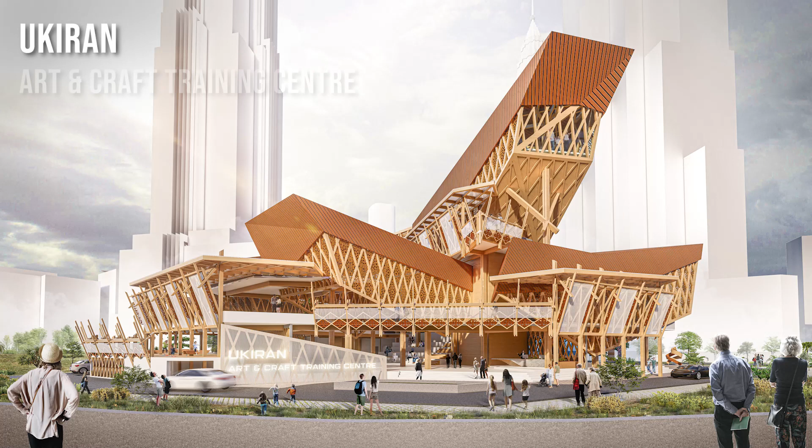Now I will be presenting my final year project, Ukiran Art and Craft Training Center, a wood carving inspired institution. The site is located between the Kuala Lumpur city area and Kampung Baru, separated by the Klang River.

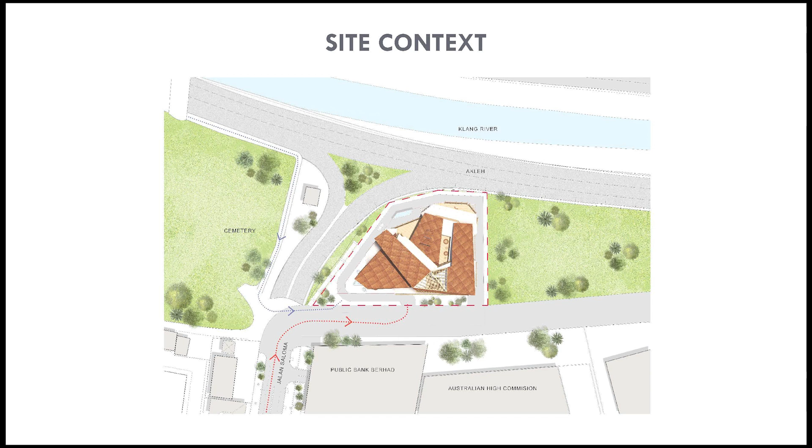I believe it has the potential to become a focal point that brings together people on both sides of the river. The art and craft industry in Kampung Baru has demonstrated positive development; however, it is only popular among locals and still not well known by outsiders due to lack of public exposure. Art and craft of Kampung Baru is an asset of the old generation, and it's important to preserve this unique asset, especially in an urban context of concrete jungle.

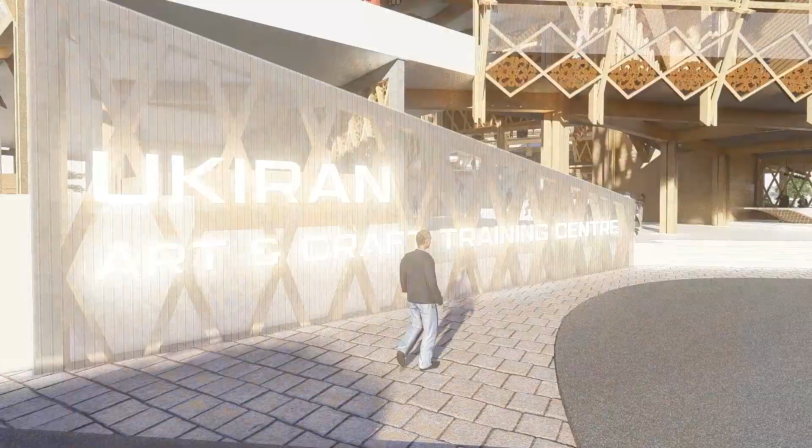The idea is to create an institution that harnesses the memory and history of Kampung Baru, allowing the future generation to recognize and appreciate the glory of art and craft in Kampung Baru. I intend to build an art and craft training center to recognize the potential of the art and craft industry in Kampung Baru and promote it to a larger context, while creating mutual understanding and connection between the people of Kampung Baru and Kuala Lumpur city area.

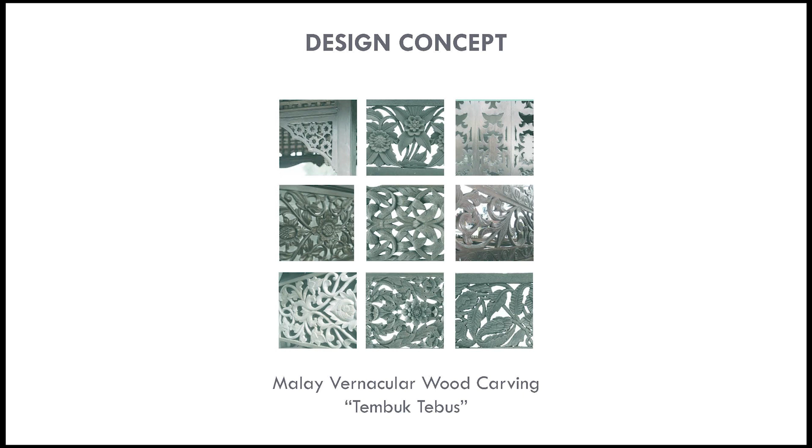The design is inspired by the unique Malay vernacular wood carving technique, reinterpreting the analogy of Tembuk Tebus carving. The four spirits of the wood carving technique—permeability, connectivity, aesthetic, and identity—are incorporated into the facade, structural, and spatial design.

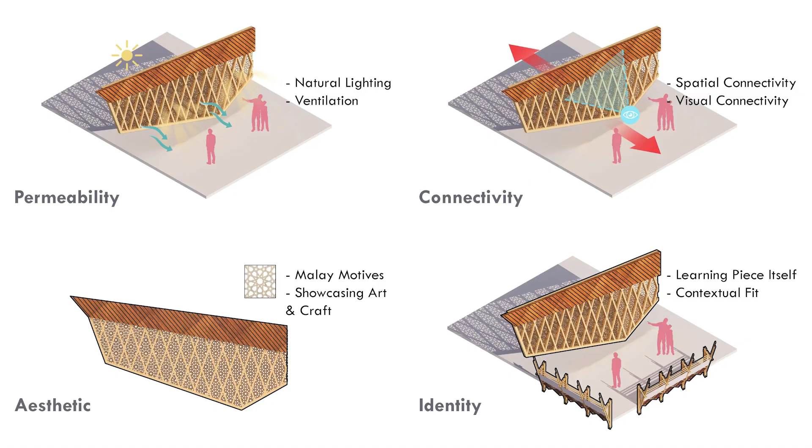Inspired by the Tembuk Tebus, the facade creates a series of frames and geometrical patterns, allowing for daylight and ventilation while also enabling visual and spatial connectivity. The facade also contains rattan weaving that demonstrates Malay motifs, which hold a strong identity in the context and is very appropriate to incorporate into the art and craft training center.

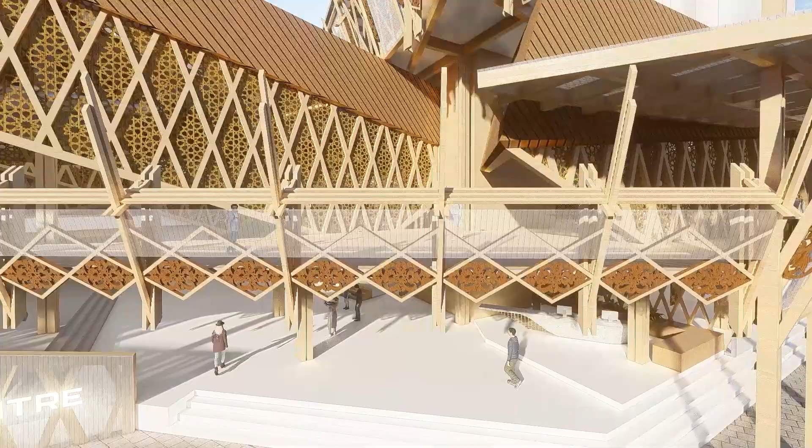Just like the wood carving, a series of porous and flexible spaces are created to facilitate communication and progressive learning in the center. The interplay of solid and void allows people in different spaces to overlap, promoting interaction and communication, and importantly allowing visual communication for them to see and learn from each other, which is appropriate for a training institution.

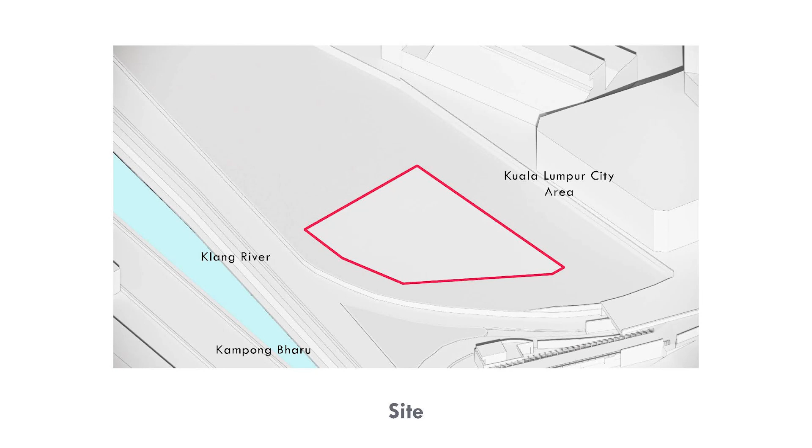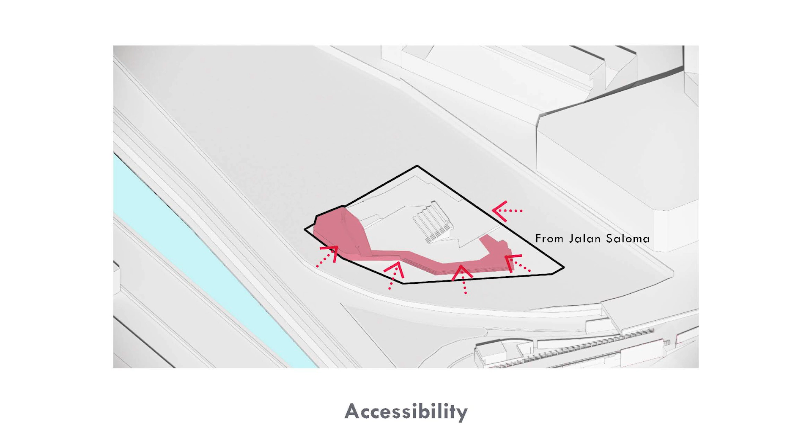In responding to the site context—the Klang River, Kampung Baru, and Kuala Lumpur city area—the ground floor is designed to open up towards the surroundings, allowing access to the building. The building massing has different responses to the site, for example, a visual response towards Saloma Bridge and Kampung Baru, and a hierarchical response towards the Kuala Lumpur city area.

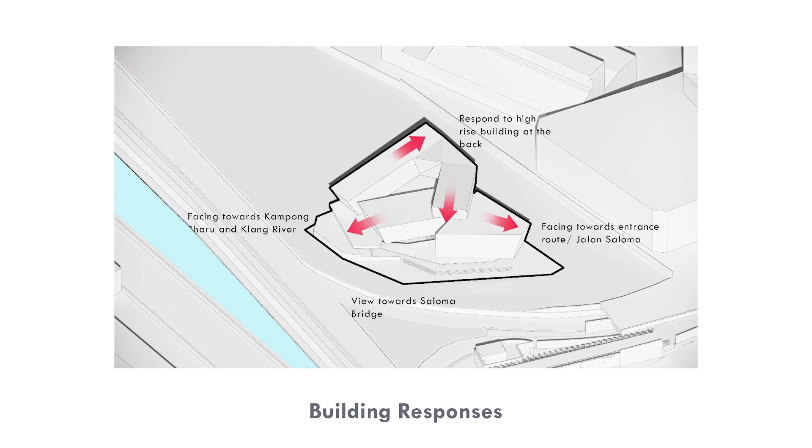The space and floor area are designed to allow spatial permeability from different directions. Lastly, the facade, which complies with the design concept, is incorporated into the building.

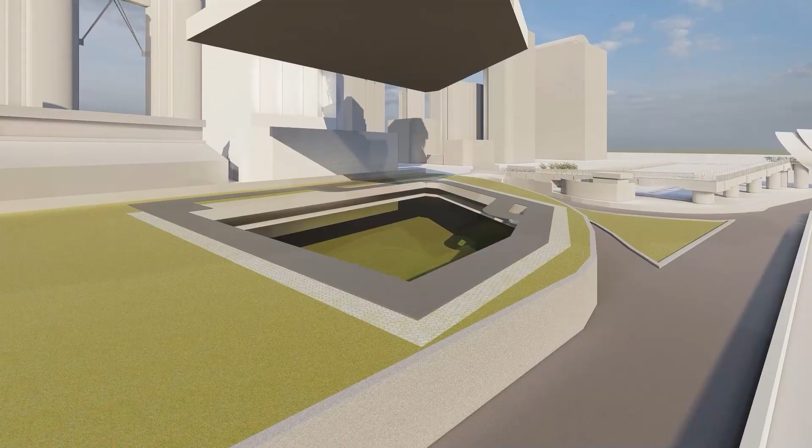With the use of a series of pilotis, the ground floor has maximum permeability for visitors coming from different directions, allowing visual connectivity to the activity. The use of timber structural columns and beams showcases the beauty of timber as a traditional building material that is flexible enough to fit into a modern building.

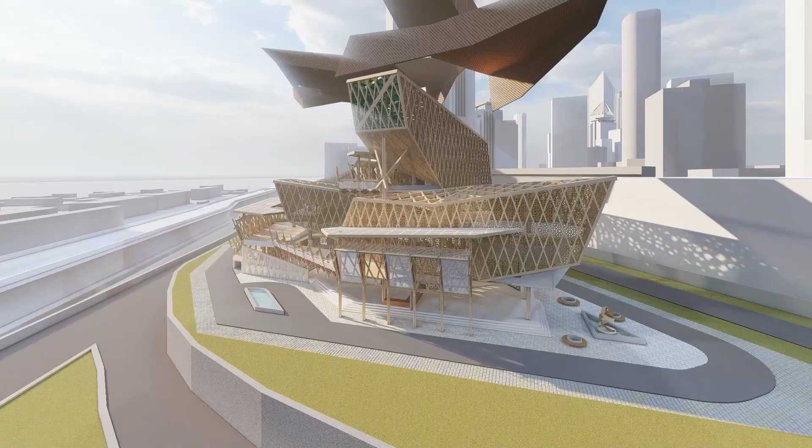The floor is arranged with a hierarchy responding to the increasing height of the building towards the back. The timber facade covers and wraps the building, giving it its overall form. The sculptural and unique facade treatment stands out within a context full of concrete and steel, and will become a landmark in the future, drawing people's attention from both Kuala Lumpur city area and Kampung Baru.

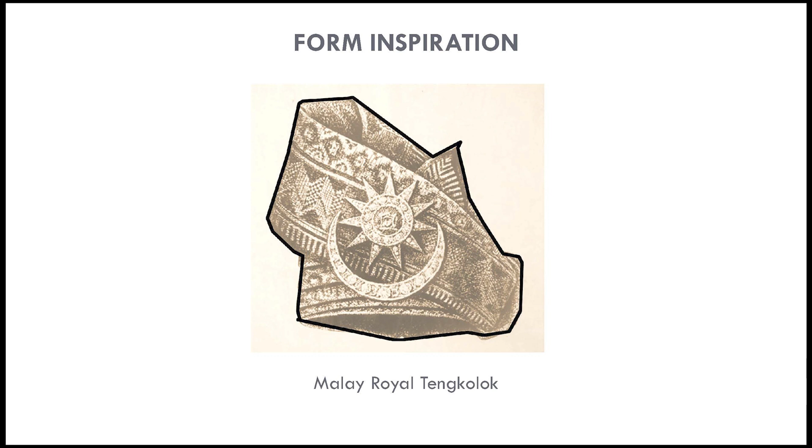The building form is inspired by the Malay Royal Tengkolok as a commemoration of the historical event of Kampung Baru as a piece of land given by the Sultan. It is a powerful and influential symbol and brings pride for the art and craft in Kampung Baru.

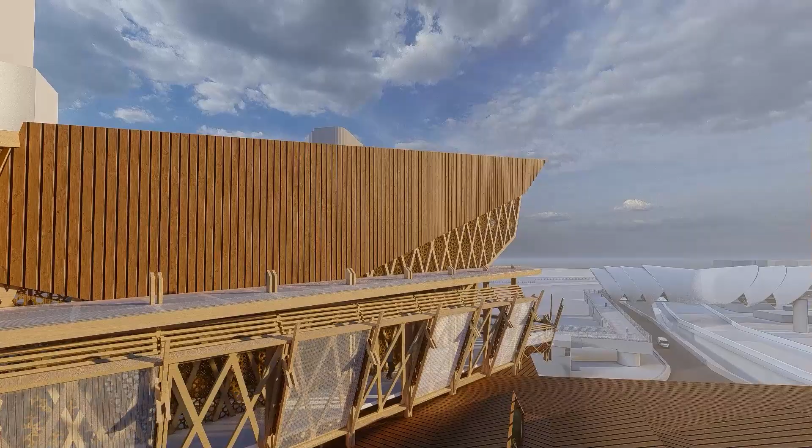The dynamic form and facade imitates the motion of the Tengkolok being wrapped, and the peak massing suggests a hierarchy on form, and also function as a space overlooking towards the historical Kampung Baru and also Saloma Bridge.

Being the unique features of the building, the timber facade starts with a primary timber skeleton, which is used to support the diagrid-like timber structure. Then, the intersect points between the diagrid timber and the floor are secured with round hollow structural sections, transferring the weight of the facade to the beam.

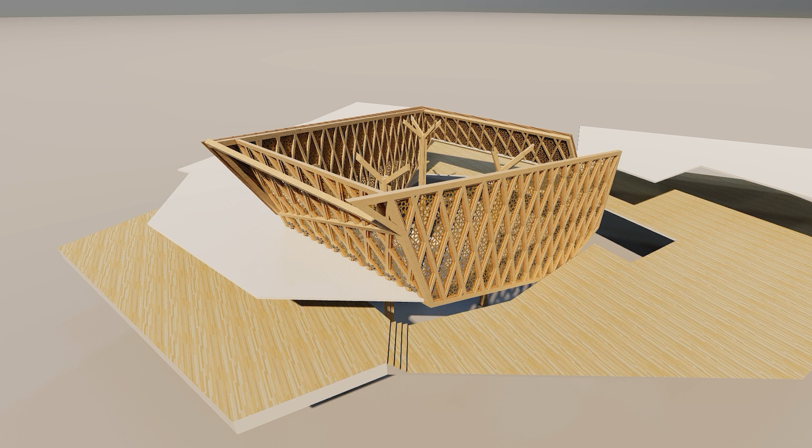The rattan weaving panel is then added to the diagrid frame, further enriching the context of the facade. Then lastly, the timber rain screen roof structure is added as a final touch-up, and it is supported by the timber column.

This construction detail allows the facade to be portrayed as if it is floating above the ground, giving it a light and elegant presence.

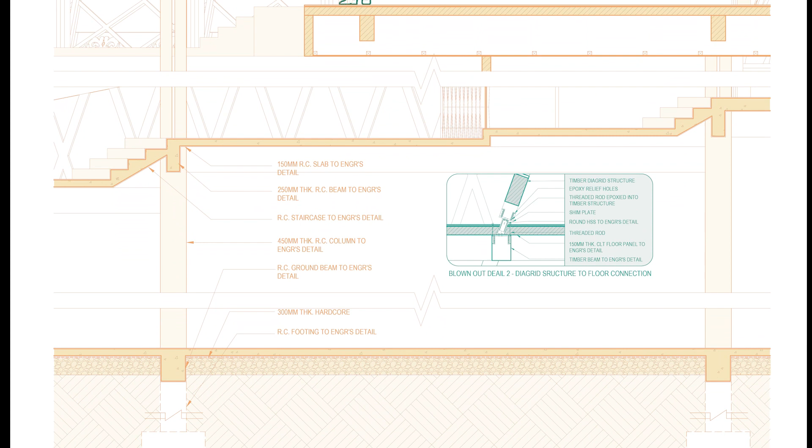The building program aims to implement three core ideas: to recognize, revitalize, and rehabilitate. To recognize and learn more about the beauty of art and craft in Kampung Baru, then to revitalize and promote the art and craft industry in Kampung Baru to a larger context.

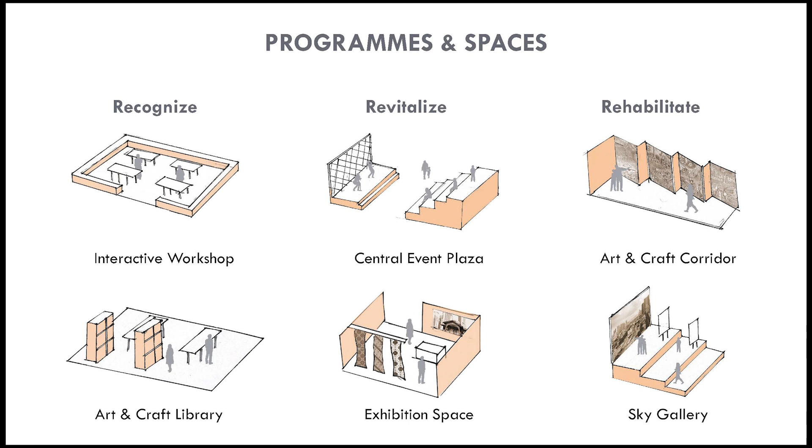Lastly, using art and craft as a medium to create public awareness about the historical significance of Klang River and Kampung Baru. The interactive workshop is an open workshop where it allows for better communication and interaction between the participants,

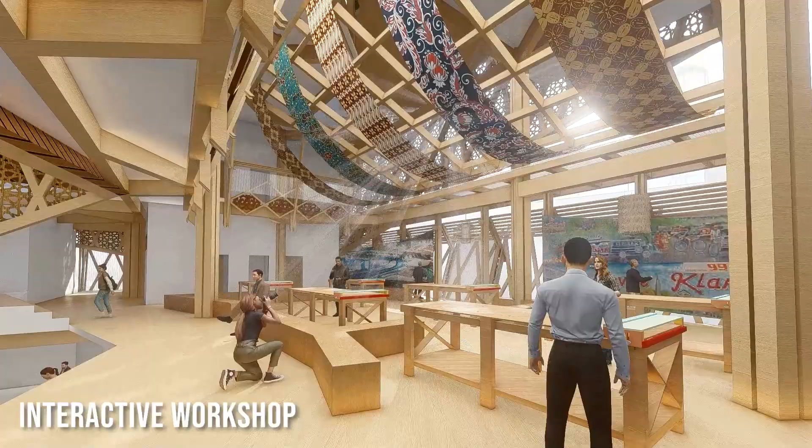and at the same time allows others to be exposed to some of the process and knowledge of craft making, thus drawing attention and interest on the art and craft in Kampung Baru.

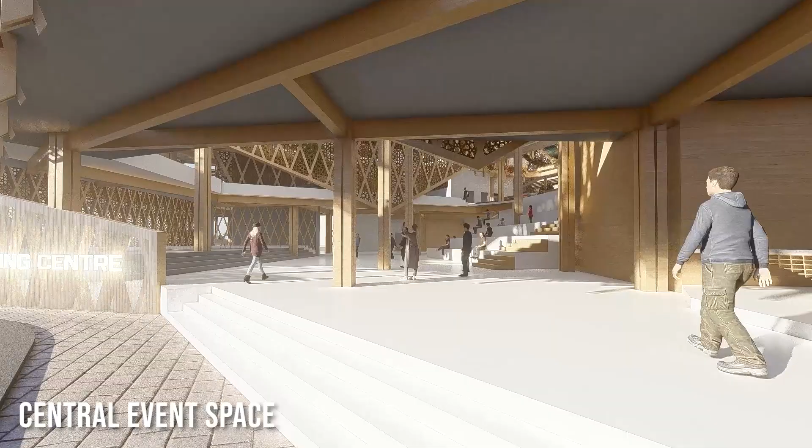The central event space is a theatre-like plaza where it serves as a multi-purpose space and allows for different events to be held here. The open and anonymous space allows for interaction between the community and further promotes the art and craft industry.

It also serves as a performance platform to allow visitors to appreciate the beauty of traditional performing arts. The skylights allow daylight to splash into the interior, further emphasizing the importance of the space.

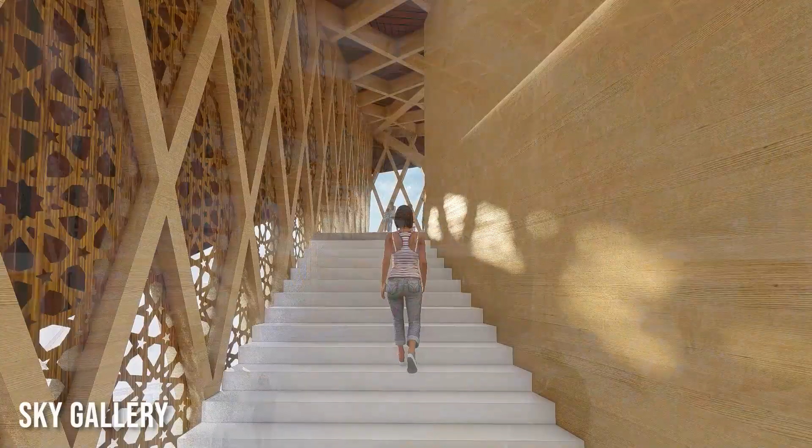The Sky Gallery is located at the highest position of the building, where it serves as a gallery that showcases the history and information of Klang River and Kampung Baru.

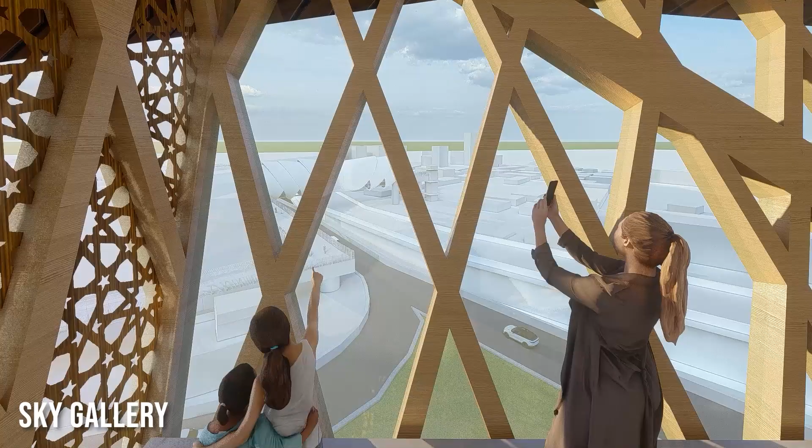It also allows visitors to take a great view towards the Klang River, Kampung Baru, and Saloma Bridge, further evoking the sense of belonging towards the site context after knowing the history of it.

The extensive use of timber with a contemporary form is a reinterpretation of the Malay house in a contemporary way, and also the inspiration of wood carving technique on the facade is a unique architectural expression that responds to the art and craft industry and construction technique in Kampung Baru.

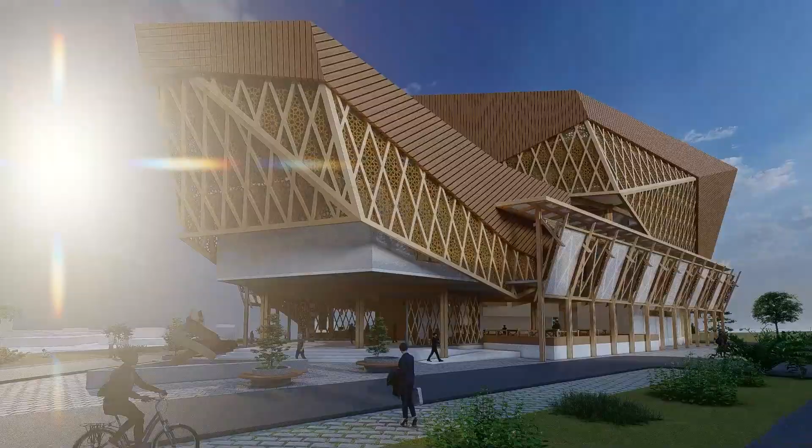As a conclusion, this proposal of Art and Craft Training Center will be more meaningful and bring positive impacts for both the Kuala Lumpur city area and Kampung Baru.

Being the last piece of Malay reserve at Kuala Lumpur, Kampung Baru needs a place for people to remember the past and history and embrace the future possibility of development.

This project will become an iconic piece of architecture which resembles the culture and memories in Kampung Baru that sits on the contrasting context, drawing people from the Kuala Lumpur city area and at the same time overlooking Kampung Baru in the present as if it is in the past.